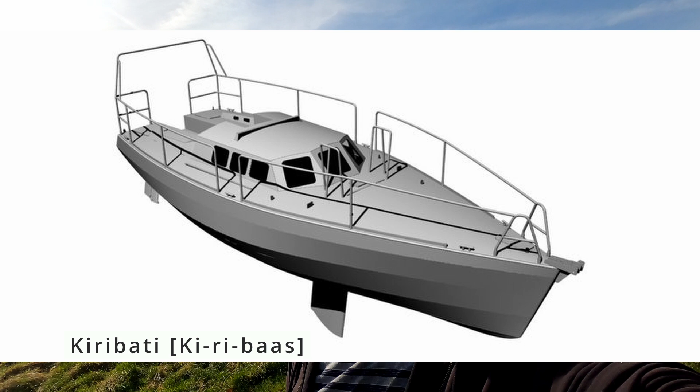Welcome back to episode 6 of the Kiribati boat build, an aluminium 36-foot sailboat. In this episode I will go through a little bit of keel box work as well as stage 10 on the cost calculation, which is the front rudders. In the previous episode we went through the rear rudders, as I call them, because the front and rear together become the actual rudder function itself. So let's take a look at that.

Good morning, it's 7:20 and I'm taking the opportunity to pick up some boat parts from my friend who has welded, before I start my day job. What I'm picking up is the keel box, which is what the keel goes up into when it's in its upward position.

The way I went about having the keel box made was I started with the upper and lower keel bearing clamps, which hold the actual pivot rod of the keel in place when it's fixed to the boat. I had the upper keel pivot clamps welded to one side of the keel box, then added extra support for those clamps, and had the other side of the keel box made. So I was left with a front and a back part, and the reason I kept them apart for a long time was the sheer size and weight.

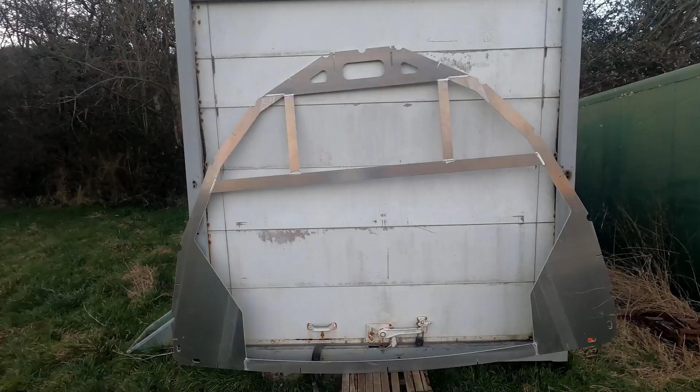Bulkhead number 5 ready for storage, and hopefully that will be part of a boat one day. That's the plan anyways. One step at a time, one step at a time.

Too muddy to get up on the field, so I'm going to see if I can offload it onto the trailer instead of putting it straight into the unit.

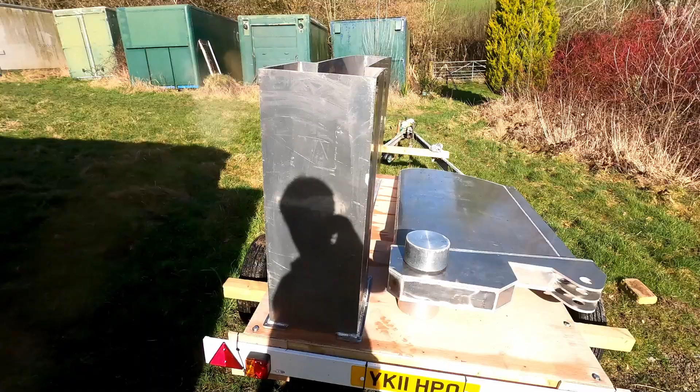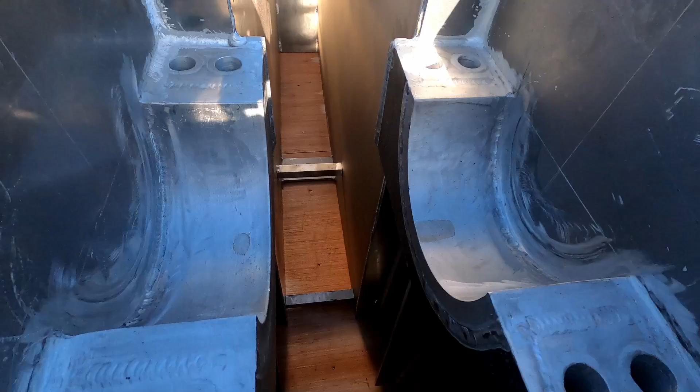With the help of my dear brother-in-law Matty, it's now on the trailer. It's way too heavy to do by myself, so I needed an extra pair of hands. So this is now the keel box on the trailer with the keel - that's the upper keel pivot bearings, welded to the side.

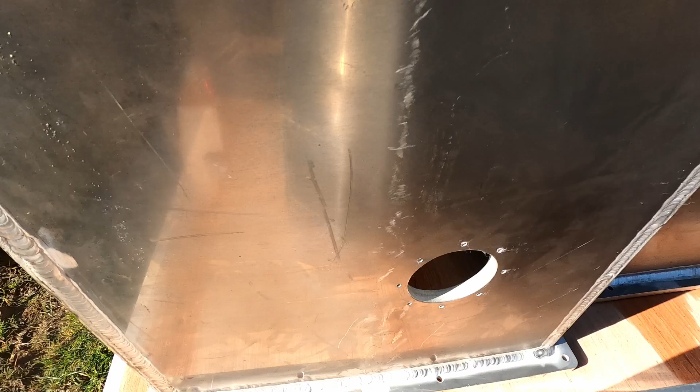The job for today is to thread these M6 holes - 1, 2, 3, 4, 5, 6, 7, 8 M6 holes. I'm going to use the tool that I designed so that I know I'm threading it straight. So I'll show you a bit about that.

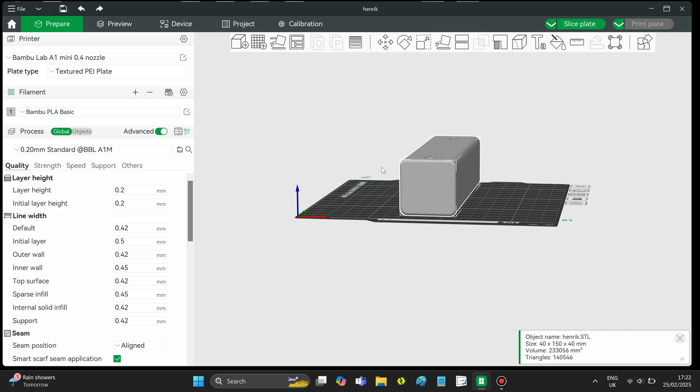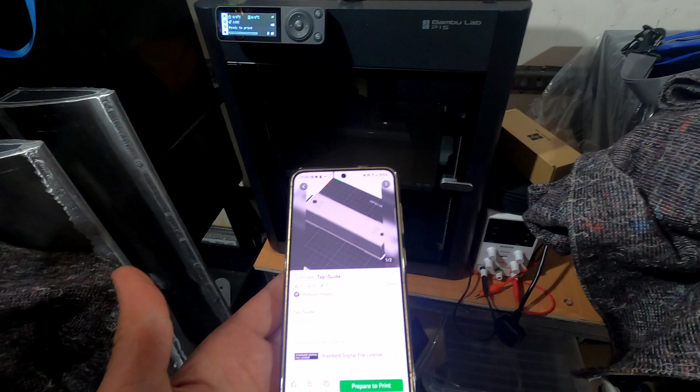Time to start printing the tap guide that I've created. Let's go into the app and set that to next. We'll set the filament to PLA basic, and we want to do a time lapse, and that should be it.

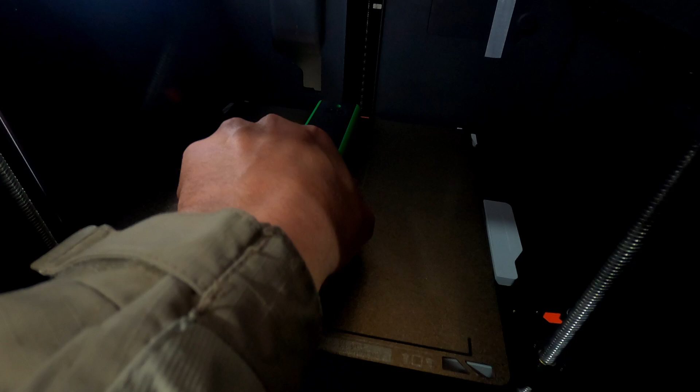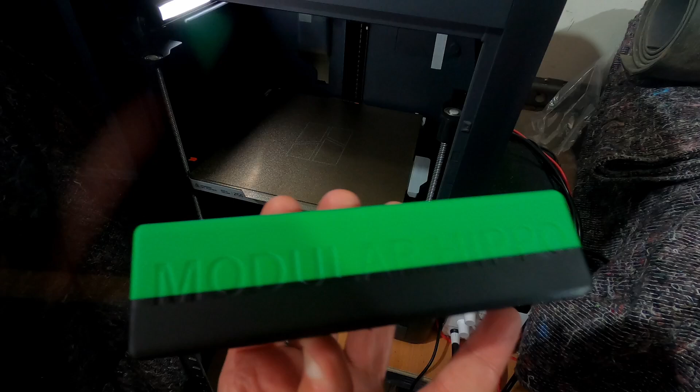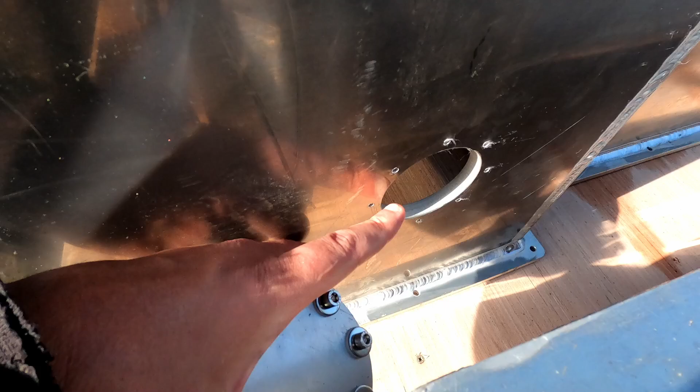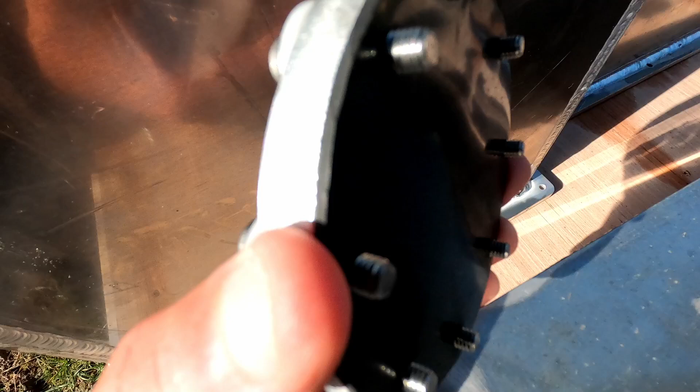So the first task for today is to make sure that these holes are threaded as mentioned, so that I can put this lid, this round lid on. It's literally just a 10mm round aluminium 5083 lid with a 2mm rubber seal on it, and it's just some M6 stainless steel marine grade bolts.

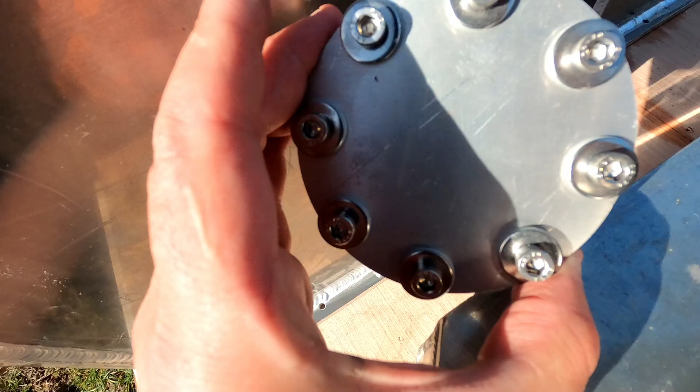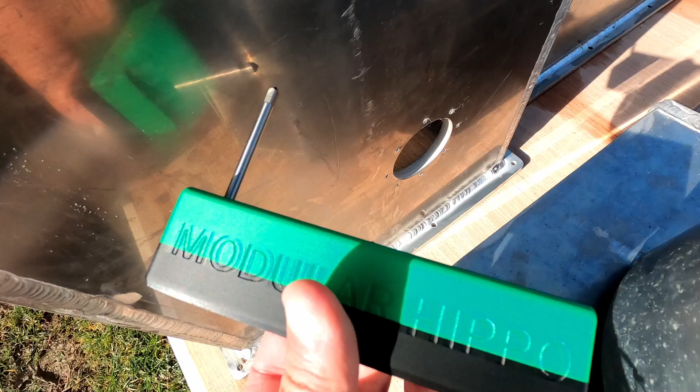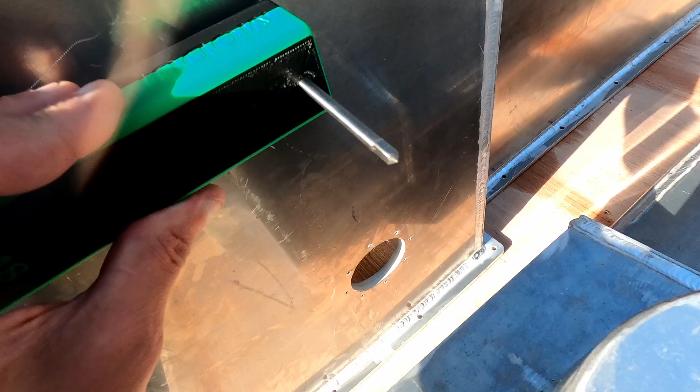So to make sure that it's straight, I have printed this tool that Marian helped me to put together, and it allows me to make sure that the tap is straight when it goes in, just by putting it flush against the surface. So we'll see if that works. Hopefully that should do the trick. We'll give it a go.

I forgot to mention an old trick I learned in college when I was working with machining, and that is if you use methylene spirit on the aluminium when you work on it, it will cut much better instead of going all greasy and clogging up. So just a bit of spray of methylene spirit on the tap itself and around the holes, and you get a better result.

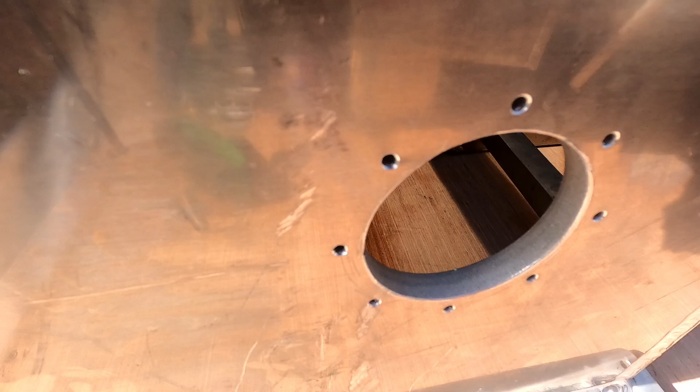Whenever I laser cut, the holes always seem to come back smaller than the actual size. I think these should have been laser cut as M5 or 5mm in diameter, but it's way narrower, so the tap doesn't really grip. So I need to go to the hardware store and pick up an M5 drill.

And we have M5 drills. Woo!

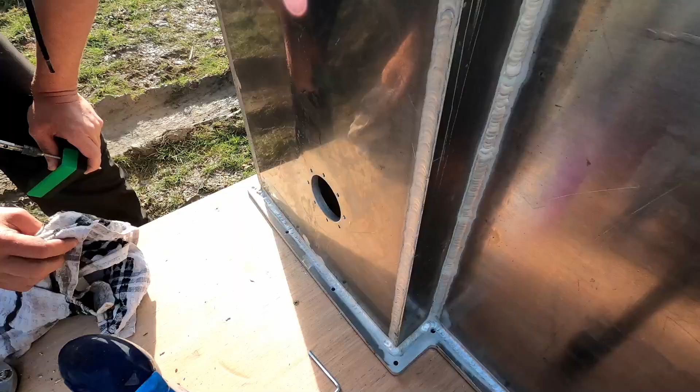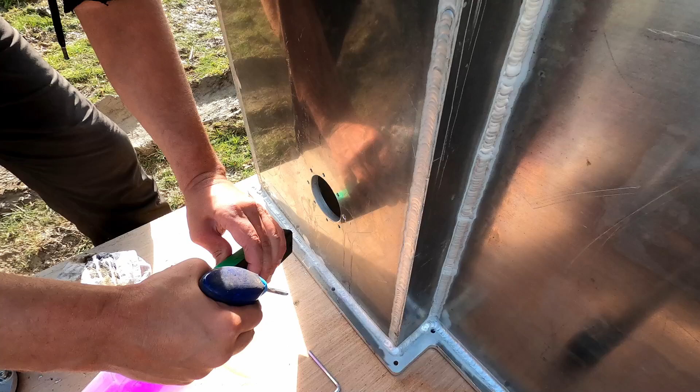And the last one at normal speed. So I have countersunk a little bit here. I made sure it's 5mm. A little bit of methylene spirit on the actual tap as well. Use the homemade guide to make sure it's straight.

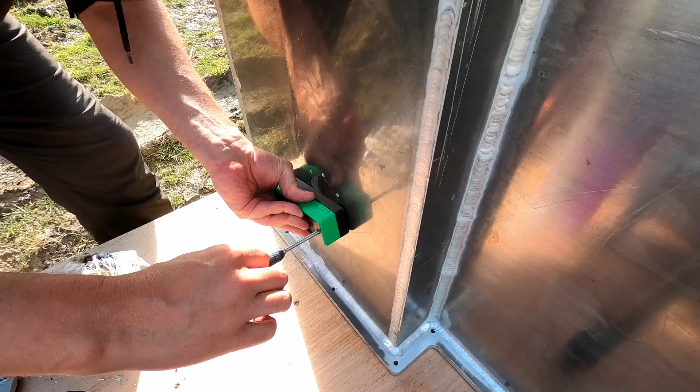And normally it is a couple of twists forward and half a twist backward, just to kind of loosen up. And once I know that it has gripped okay, I should be able to ease off the guide and then keep on going all the way through. And then gently screw it back out again.

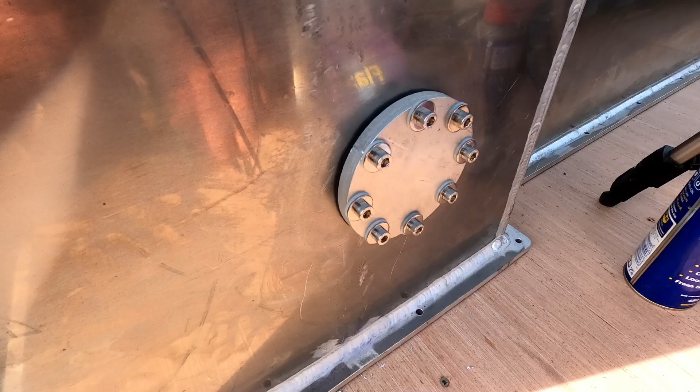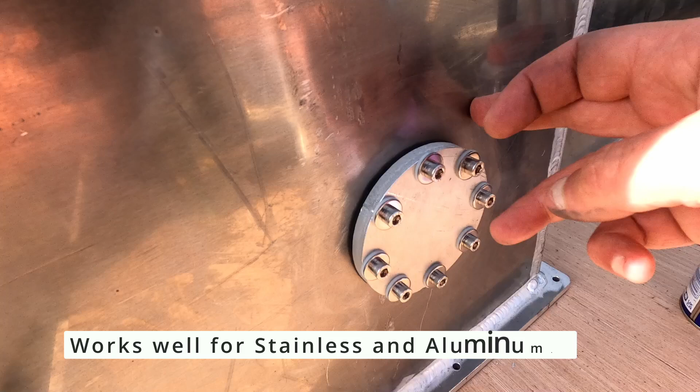And as always, because we're going from stainless steel into aluminium, once this is fitted once and for all, it will be fitted with either Sikaflex, or another compound I found, which is more like a copper grease, but I think it has another metal in it, which is used on airplanes and works really well for stainless and aluminium. But I need to look into that more, because I'll probably rather use that than Sikaflex. More about that in future episodes.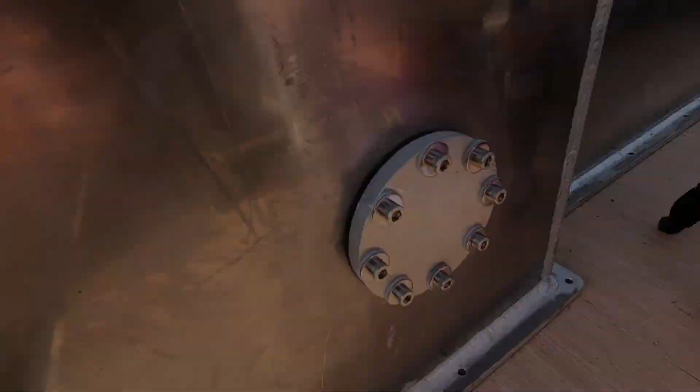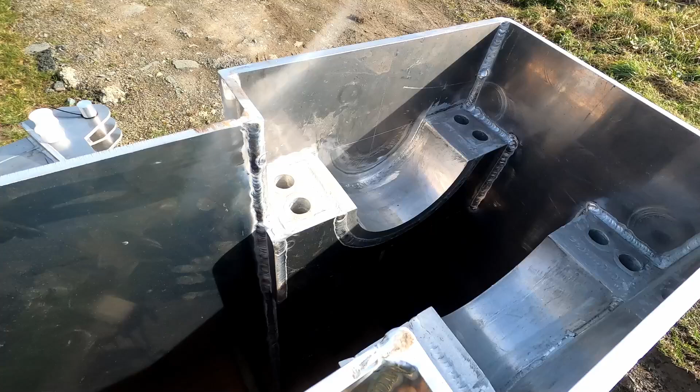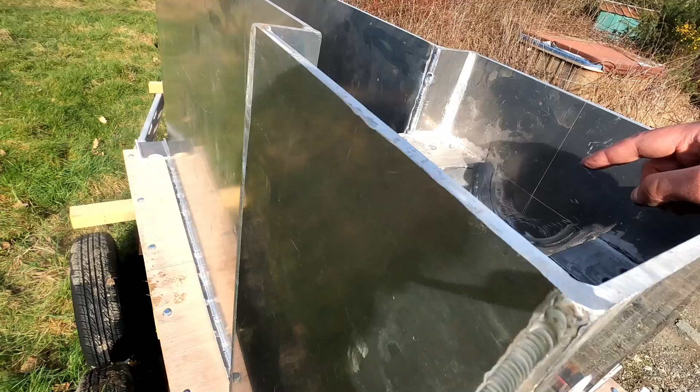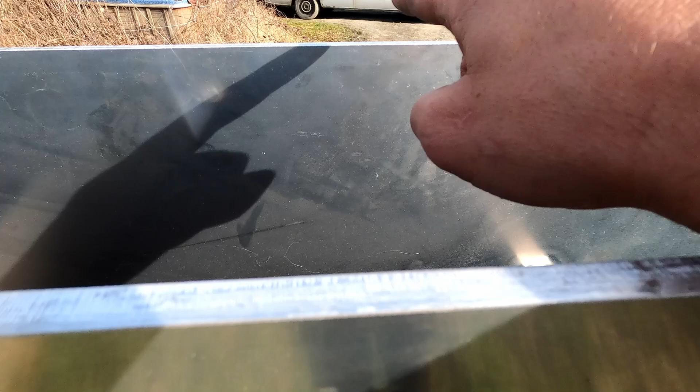Next task is to work out exactly where these shelves or brackets should sit in relation to the keel itself, where the keel bearings will be resting. When the keel is in its downward position, part of the keel will rest onto this piece here, so the question is where will I set it. What I'm thinking is, if I measure from this center point on the keel bearing to the little rod that will be resting on that shelf or bracket, from center to center, I can then work out the center point here and draw a line all the way up to the center here, and that will be the center of the cradle in theory. So that's my next task.

A couple of other things happened this week, or a couple of weeks ago. I received the two Seplos battery boxes that I will be using. As mentioned, I will be building them at underfloor level, very close to the keel and the ballast. Part of this, around 200 kilos, will be used as ballast, so I will remove 200 kilos from the actual ballast to make sure I'm sticking to the architect's calculations.

Another thing that's happened is that I received the neoprene membrane that I will be using between the lead and aluminium when I'm closing the keel up after I put the lead in. So that's a step forward as well. I'm not going to unpack that yet, I'll do that closer to when it's needed.

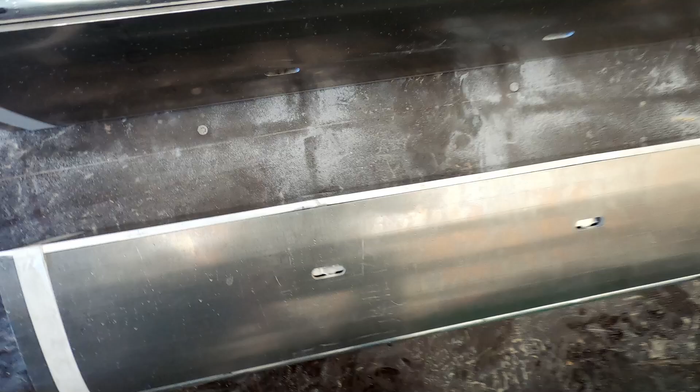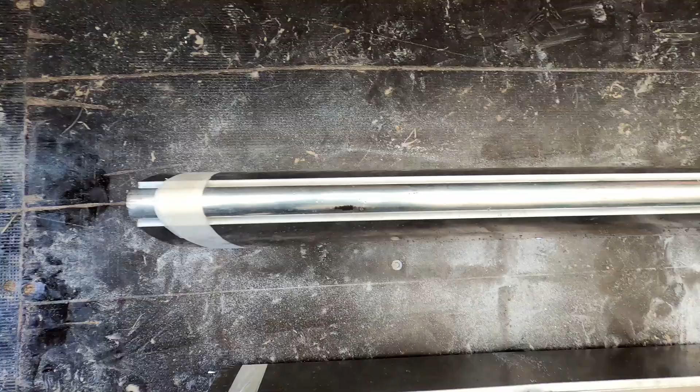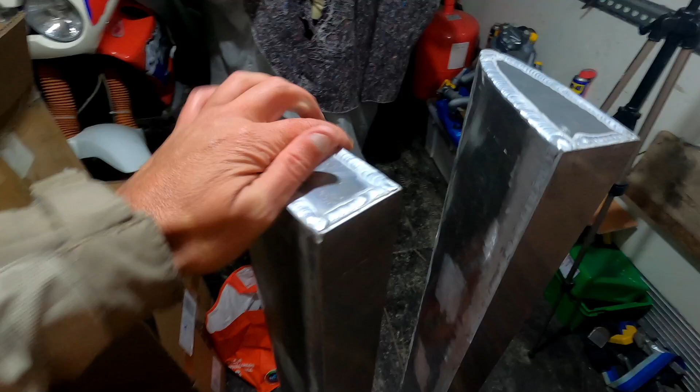So these are the two front rudders, as I call them. The smaller parts of the rudder that are fixed to the actual hull itself. So it's only the rear rudder piece that is actually moving and is movable.

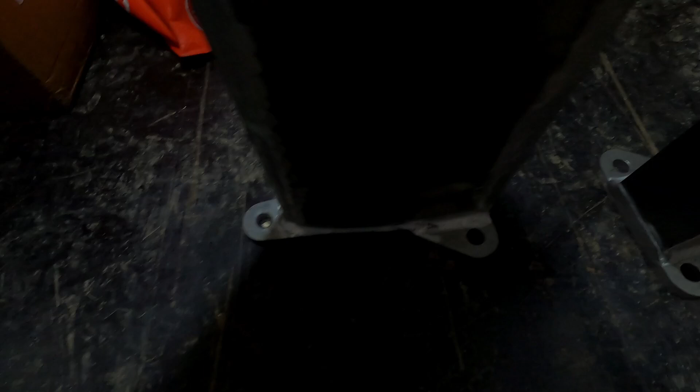Really happy with these. The welding is really good, so I don't think I need to worry about any structural issues going forward, which is lovely. And here's the little foot at the end that will be bolted to the foot that holds it together with the rudder stocks.

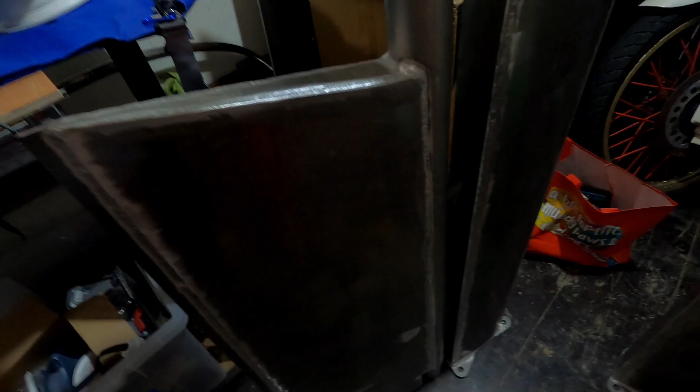If we put it next to the rear rudder, then it makes more sense. So that is the swiveled rear rudder, and that is the front bit that is attached to the hull itself. Let's see if I can come out a bit.

Total cost so far, stage 1 to 10, is £6,292.97, roughly $7,445.73. Stage 10 alone came in at £941.39, which is $1,153.66 US. Material spent was 372.27 pounds, which is $445.94. The welding came to 210 pounds, external welding by my friend, which is $262.21.

The laser cutting landed at 89.12 pounds, which is $106.75, and the machining, in this case the bending of the outer plates, came to 225 pounds, which is $281.47. There was also some tools and miscellaneous for 45 pounds, which is $57.29, and that was me having to buy a new grinder, a 900 watt grinder that could cope with the amount of grinding I had to do on these, rather than using my hopeless cordless little grinder.

So, conclusion for stage 10: I spent £941.39, which is $1,153.66 US. Of this, parts and material came to 39.54%, almost 40%. External labor, which is welding and so on, came to 55.66%, above the actual material cost, and the extra tools and miscellaneous was only 4-5% of this.

So once again, if you have more time than money, you are better off making sure you can do your welding and machining yourself before you start the project. As an example, if I had done all my welding up to this point, stage 1 to 10, I would have saved myself £765, which is $946.67, which is 12.16% of the total cost.

And if I had done all the welding, laser cutting, and machining, including plate bending, myself, I would have saved £2,186.80, or $2,647.01 US, which is 34.75% of the complete total. So once again, if you have the time, make sure you have all the tools and skills before you start a project. That will save you a lot of funds.